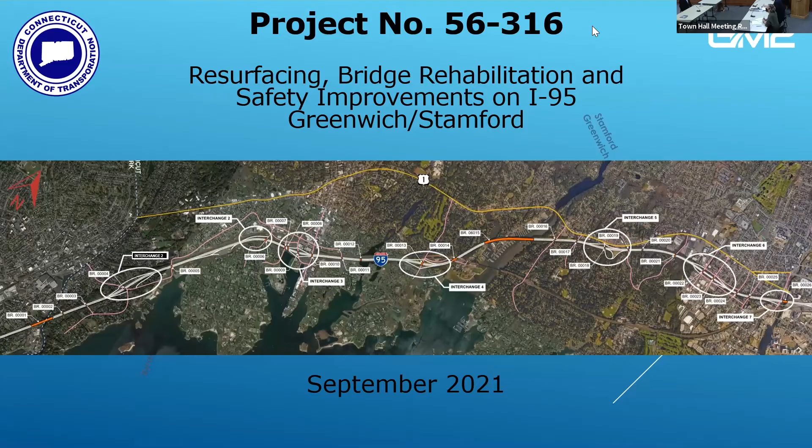So for this project, my team is starting to get really into the weeds, no pun intended, performing what we refer to as an inventory and analysis of exactly what's going on out there for existing vegetation, reviewing the impacts of the project. We are hearing you guys loud and clear about your desire to expand native reforestation species wherever possible, and work with you in a design sense about any opportunities to develop gateways and things like that.

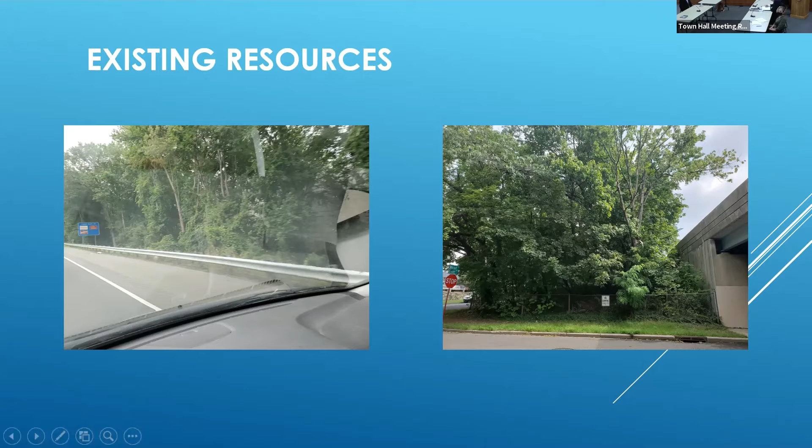Next slide, please. So what's out there? Next slide. Windshield survey. I've walked many of the neighborhoods surrounding the corridor right now. I have a pretty good idea of where there's great plant communities and where some of the plant communities could actually use some revitalization.

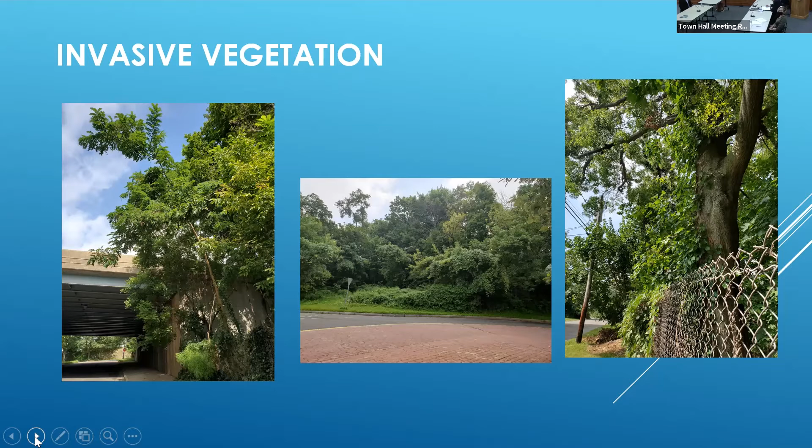Next slide. You have a lot of what you may think are canopy species, and I support and appreciate the value of some of these species as canopy trees, but all of these trees are considered invasive species. So they're weak wooded, and they're not performing a whole bunch of ecosystem services. So I just have to share that with everybody as we move forward. Next slide.

Wherever there are good resources along the corridor, which would be impacted by the project, we're going to find them and do everything we can to keep them out of harm's way or protect them. Next slide.

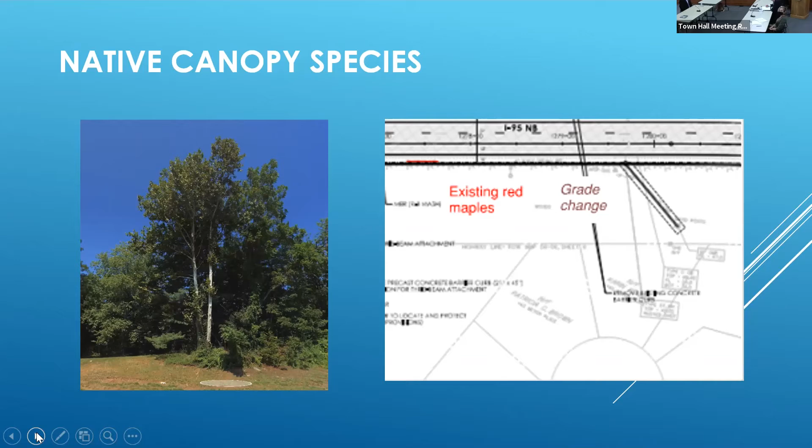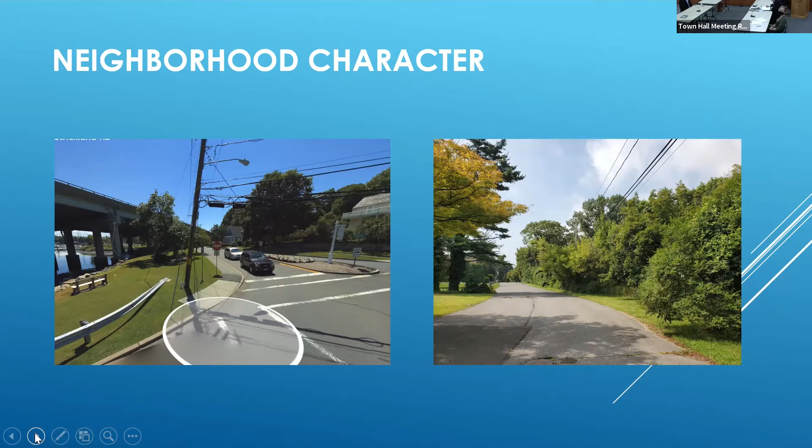But most of all, we're very cognizant of the people who live around the infrastructure and the neighborhoods and so on. We are here to listen, and we're really looking forward to getting more detailed information from stakeholders about their specific concerns.

So we can incorporate that into the preliminary design and make everybody happier when they see it at that stage. Next, the project impacts. This project, as opposed to others you may have seen, has really limited areas where we're doing wholesale clearing of a slope. We have some drainage structures to incorporate into the existing vegetation, which I just shared with you for the most part.

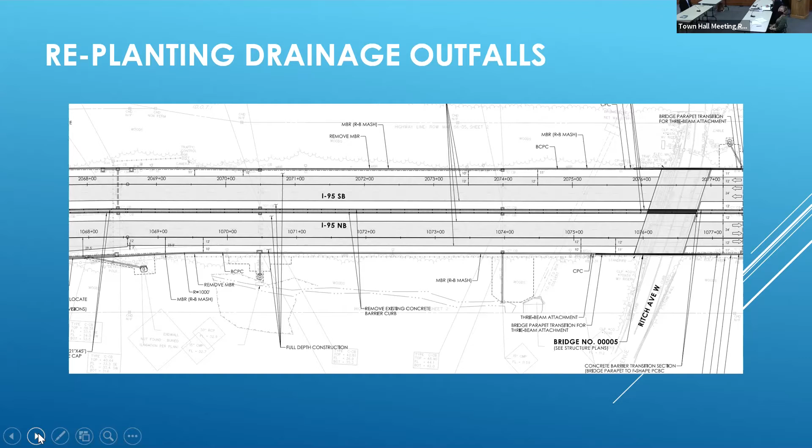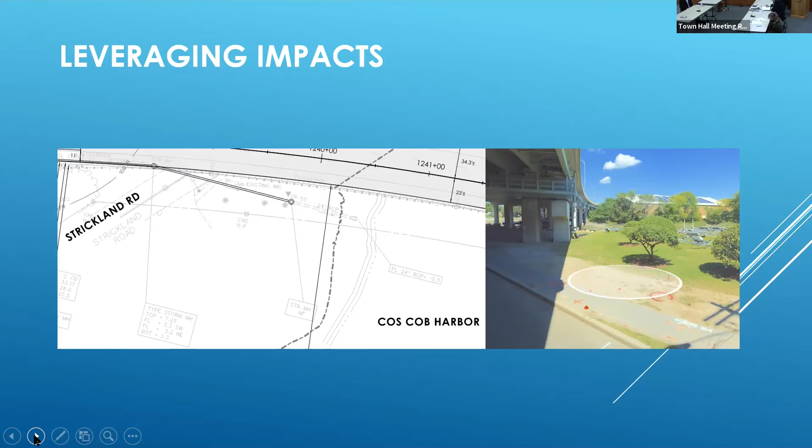Wherever we do have impacts, I have this picture up here and the corresponding drainage work that has to be done. We're going to leverage the impacts of the project any way we can to make it come out lemonade.

As you can see, I overlaid an impacted area, sharing with you the existing vegetation, which may or may not be impacted. We have a standing but dead tree in this area, so that's the way we're going to drill into this. If there's a good tree and we can protect it, we will.

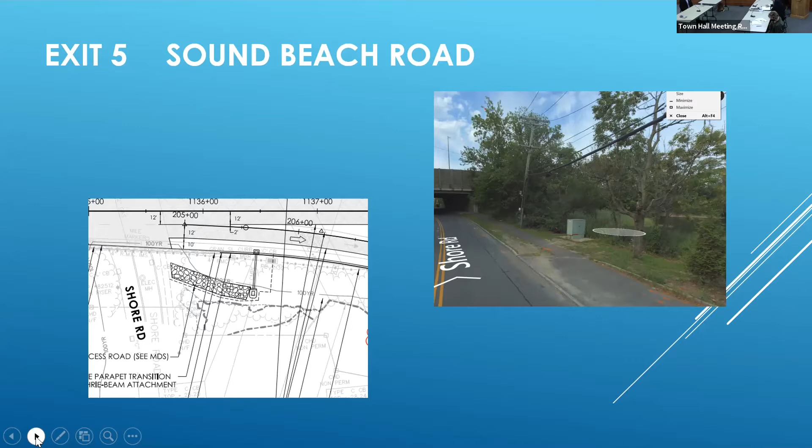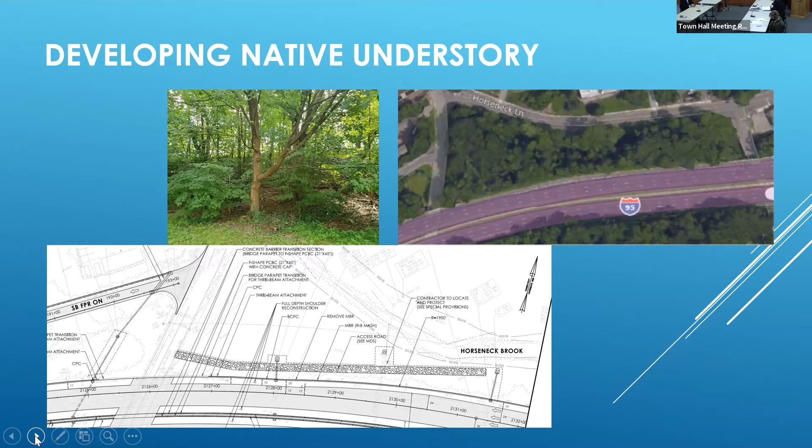Any impacts that we have, because of the engineering, drainage, and maintenance needs on this project, we're going to look at as an opportunity to revegetate and improve biodiversity. I'm going to go into that area and walk around to see where the nice oak trees are and see how we can protect them.

But also see how we can enrich the vegetation wherever there is an impact. Next slide. Okay, this is a little complicated, the next two sections I'm going to walk you through, but this is what we do. We focus on the cross section, and anyone who's been in our previous meetings knows we take it very seriously.

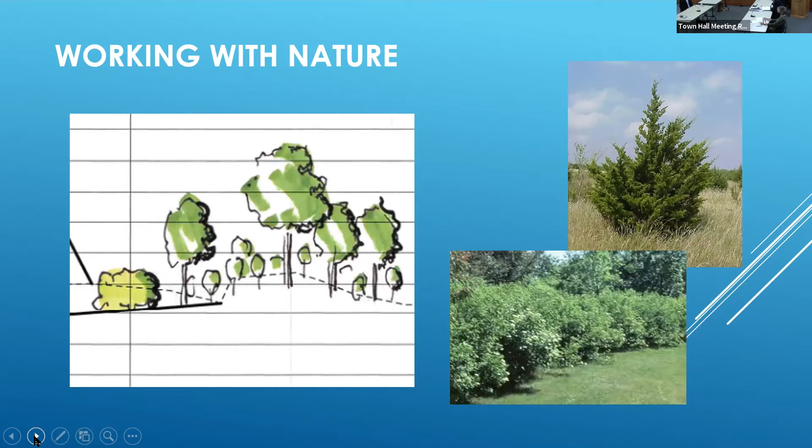We have a lot of things going on in our right-of-way, but we want to work with nature. We need to understand what Mother Nature would do in Connecticut if left alone to her own devices, and I'm going to show you how we work with that. Fighting Mother Nature never works.

So not only are we working with our maintenance people, but we're also working with drainage structures. I'm showing you a reforestation in Bridgewater on the left-hand side, and there's a swale behind that retaining wall, which can't have reforestation trees growing up against it. It would knock the wall over and clog the drainage system.

So we are talking about using the right kind of vegetation in the right place to provide reforestation and other services. What we have learned from our reforestation efforts is that we stay out of the way of the orange trucks and work with how the highway corridors are maintained, and we are successful. The image on the right, I just drove past that area—those trees are 40 feet tall. They went in at 2 to 3 foot tall whips.

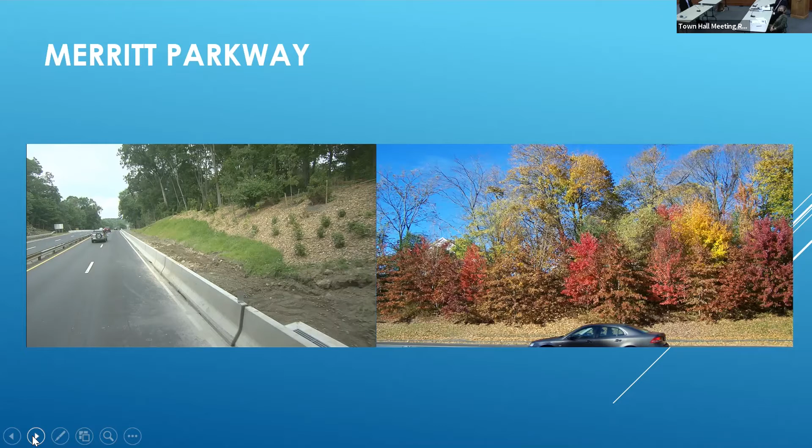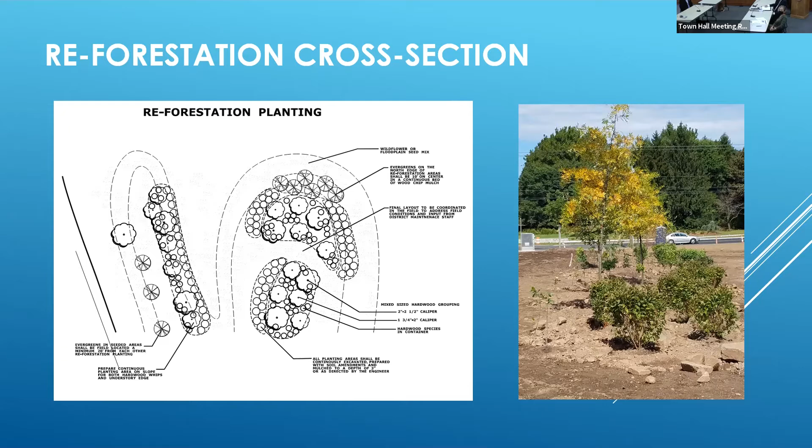This is a sample of the project that's ongoing down in Stratford. This is what our reforestation looks like on the plan, and directly after construction it's going to look like the pictures I just showed you, but it's going to work. We're going to put native tree species back on the 95 corridor wherever we can.

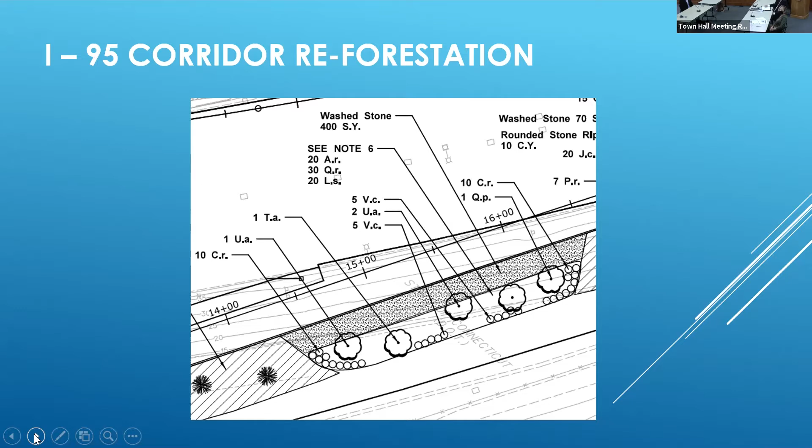So those plant communities, some of the sketches I just showed you, sometimes they're going to be evergreen trees. Evergreen trees in and of themselves, we have to be able to mow around them, so we have to really consider carefully where those are going to be located along the corridor. But we will look for those opportunities.

The native canopy species—again, what I'm showing on this slide, the lower picture, I just drove by it. That's the Fairfield salt shed. The trees go in at 2.5 to 3 feet tall, and we use them in combination with 2.5-inch caliper trees.

The picture on top in the center really shows how this works. This is the Old Saybrook train station. The oak trees on the left went in as whips not too long ago, and look how they are almost as large now as the 2.5 to 3-inch caliper oak on the right-hand side of that image.

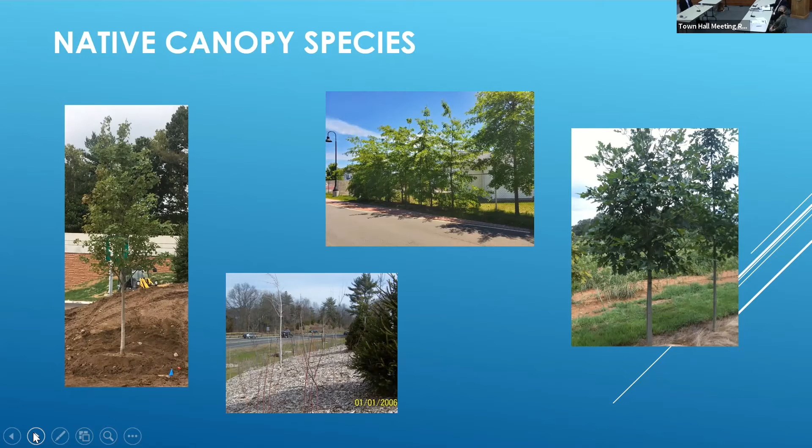So this is what we do, and it works. We're planting an entire cross section and plant community wherever we can, so that our maintenance people go around it and leave it be. And we get those ecosystem services that everybody is looking for.

The lower image in the center is working with maintenance. We have some sweet ferns and a London plane tree, strategically locating that plant community on a mini slope that we knew maintenance didn't want to deal with. So that's what we do on our projects.

And that's what you'll be seeing from us as we move forward, wherever we can augmenting the plantings with pollinator species that are more difficult to establish by seed, using gallon containers for some species that are more difficult to establish that way.

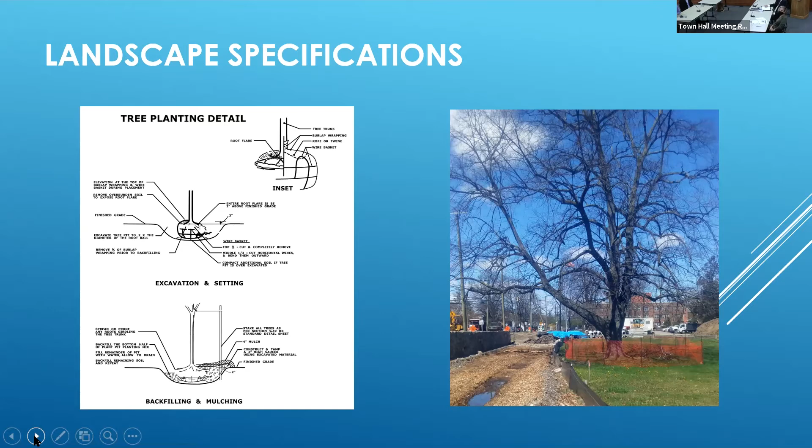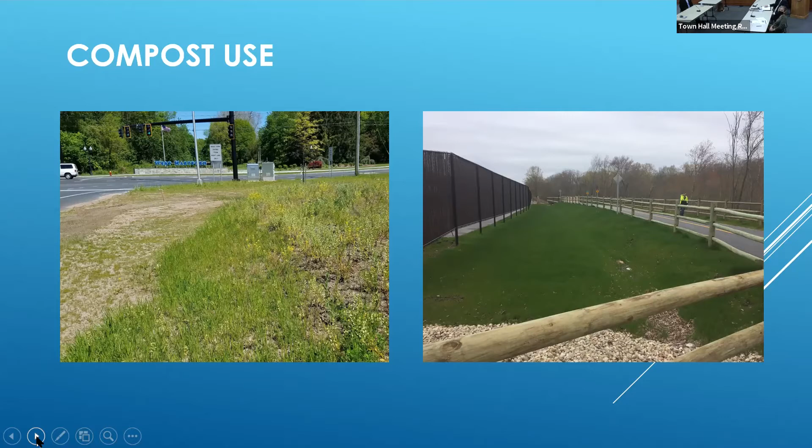Next, we're implementing compost use. In the left-hand slide, I'm showing a sustainable seed mix where compost was applied on the right-hand side and not on the left-hand side of that upper picture, and it really makes a difference in performance. You can see the swale on the right-hand side, fully covered with compost and excellent turf establishment. It's excellent for erosion control and plant establishment.

But again, working with maintenance wherever we can—the plant communities have got to be mowed around. Otherwise, they're going to succumb to the encroachment of invasive vegetation, which we don't want as we work together on improving canopy in Greenwich.

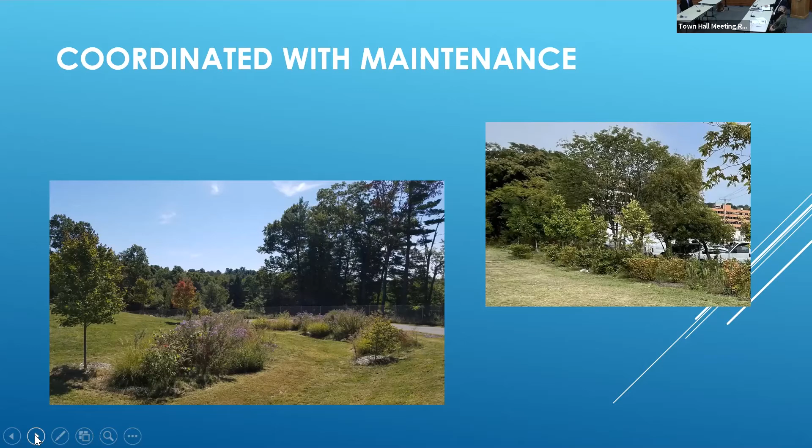The image on the right-hand side is a very small pocket of reforestation in Stamford, just to illustrate the level that we go to. It's a small area—there's probably only 30 whips in there—but we still want to reforest wherever we can. It's a natural part of our process.

This is also Cortlandt Park, and the elm trees that we put at the gateway, at the reconstructed wall. It is, in the end, about your communities. We're cognizant of that—very cognizant of designing for you, the economics of your community, and the walkability of it as well. And that's what I have. Thank you.

Thank you, Sue. Appreciate the update. I just want to emphasize a point that Sue made a couple of times during her presentation. Sue works on the capital project side—engineering, construction—so her job is to integrate good landscaping practices into our projects. But there is a handoff, to what she called maintenance forces, the guys in the orange trucks, who are out there every day mowing, weed whacking, doing the work of keeping the highway safe and operational. So there needs to be synergy between what we install in our capital projects and the handoff and ultimate maintenance of our projects to highway operations.

Next, I'd like to move to a short discussion on the I-95 corridor project. Neil Patel will be providing an update on the status of this project, but very quickly, let me tell you what this project is. Typically when we do resurfacing projects on our highway system, we use a vendor-in-place kind of contract, a maintenance contract. But some projects do not lend themselves to that—typically projects where we haven't done a lot of rehabilitation work through the years, and such is the case here in Greenwich.

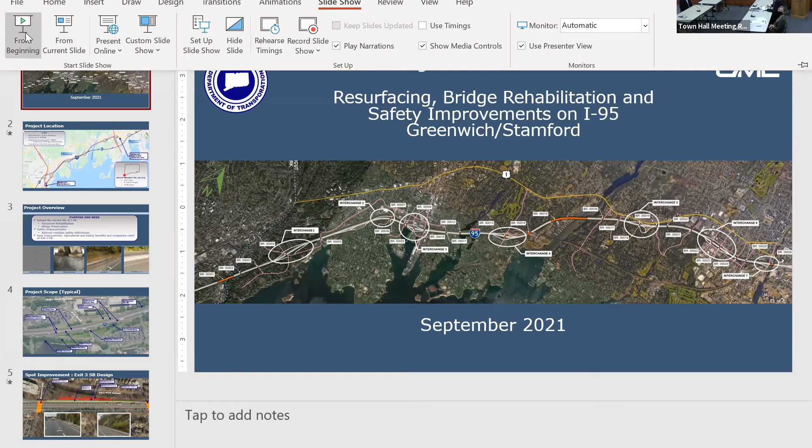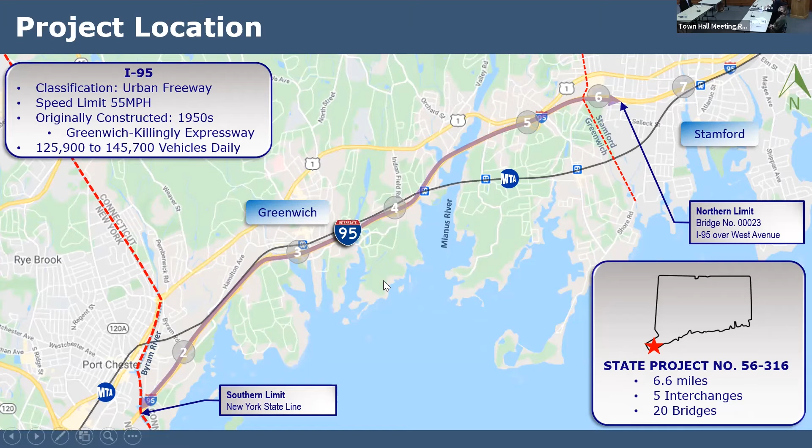Thank you, Mark. I think Mark started off by explaining the scope of the project. Let me start the slideshow. A lot of these slides are similar to what we showed at the virtual public information meeting back in January, and through some of the other meetings we've had since then with Senator Kasser and other constituents. The project limits start at the New York state line and continue for about 6.6 miles to exit 6 in Stamford.

Again, the purpose and need, as Mark mentioned, is really to extend the service life of I-95 and maintain the facility in a state of good repair. The focus is the pavement and the underlying original concrete from the 50s when it was constructed. We also want to make sure we address the bridges—this is bridge preservation type work, minor bridge work addressing the deck, partial deck patch, and the parapets. We don't have any bridge replacements or deck replacements proposed within this corridor at this moment.

Safety improvements are a big part of the purpose and need here. We want to address the existing roadside safety deficiencies, upgrading the guide rail and the median barrier, which in some places is only 32 inches, to bring it up to today's design standards. In addition, we're addressing a spot improvement at exit 3 southbound, which will provide operational and safety benefits and some minor congestion relief on the main line there.

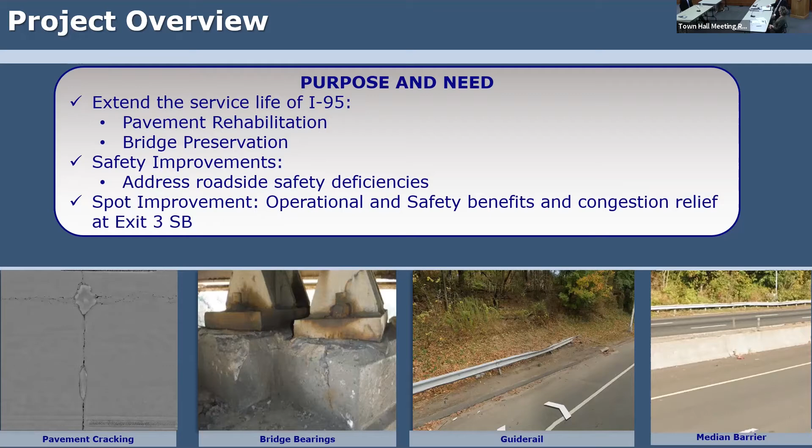In terms of addressing the pavement, one thing we're looking at is the mix design—we heard that feedback from constituents at the virtual public information meeting. We continuously do this; our pavement design group works with the UConn Cap Lab, always researching different types of pavement to work for every situation. In this case, we'll be using what's called a gap-graded mix, which performs well. Our first focus is durability, performance, life cycle, and safety, making sure the design meets all those needs. As a secondary benefit, there are some minor noise benefits, which may be evident in the first year or two but become less prevalent as the pavement wears.

This plan shows a typical slide of our proposed improvements within the corridor. As mentioned, all the illumination will be upgraded, along with new overhead signing throughout the corridor. The drainage improvements are extensive—this is an existing system from the 50s with a lot of metal pipes, and we want to make sure we address a lot of those deteriorated pipes.

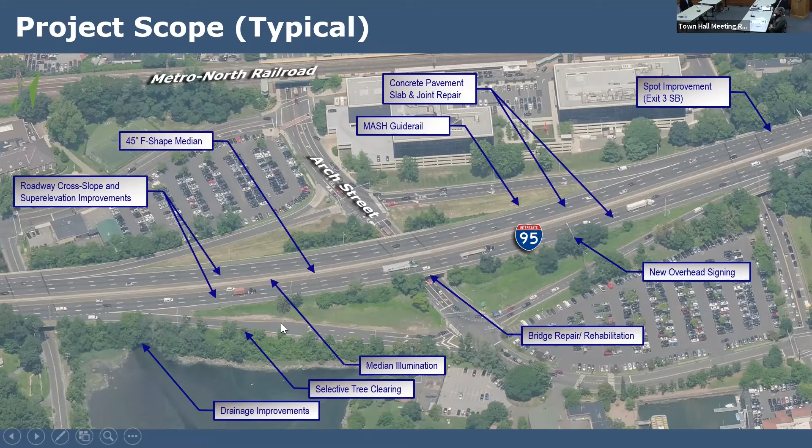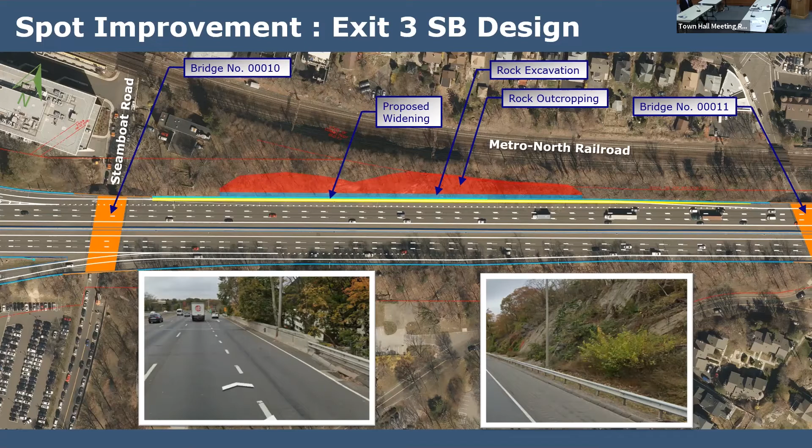At exit 3 southbound, we'll be extending the deceleration lane approximately 1,200 feet to provide sufficient storage for vehicles. We know that backs up, especially during the morning, onto the main line—a very dangerous situation. This improvement, coupled with the town's recent and ongoing work at exit 3 on Arch Street with traffic coordination, will definitely improve the situation.

Susan talked about the approach she takes, and I wanted to point out one of the areas we'll be addressing. To do some of this drainage work, we've got to build access roads down to these outlets. Our maintenance folks have told us they've had a hard time cleaning and maintaining many of these areas, and since we're coming through with this project, we have to upgrade some of these outlets. So we're going to be working to install some of these access roads.

We'll work with Susan on each and every condition to determine what treatment we can do going forward in terms of landscaping. Some of these will be permanent access roads, about 10 to 12 feet wide. We talked to our maintenance folks and asked them what they would need to get down there. So it's not tree cutting through the corridor, it's really just in select areas.

Schedule: right now we are in the preliminary design phase. We just started that, we've got our designer on board and full steam ahead to meet this schedule. We anticipate preliminary landscape design plans in January and February. Jim, as we've discussed previously, we'll be coordinating those as they become available and make sure they're reviewed by the town. We do intend to proceed to final design by June and advertise probably early fall, then start construction in spring of 2023 with about a 3 to 4 year duration.

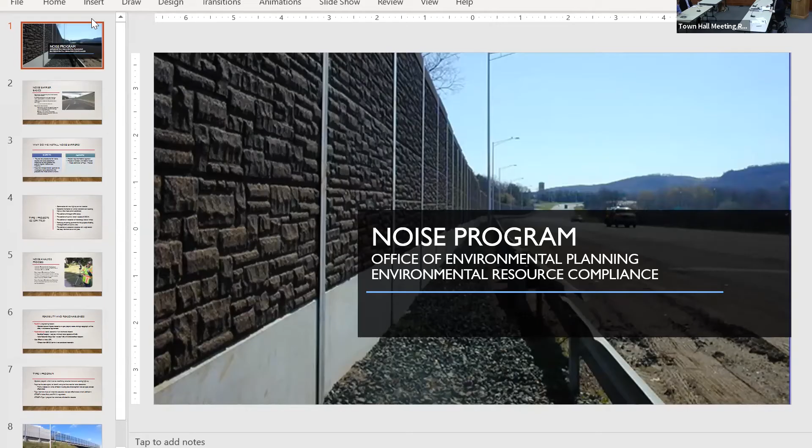Okay, thank you everyone. Just giving Neil a chance to pull up the presentation. Kim Lassay, Bureau Chief of Policy and Planning. One of the groups I'm proud to lead is our noise group, and I'm going to try to give a little bit of background, kind of a noise 101 here, to lay some framework for further discussions.

So thank you, Neil. Every project that we have goes through a screening to determine if a noise analysis and a noise study is required.

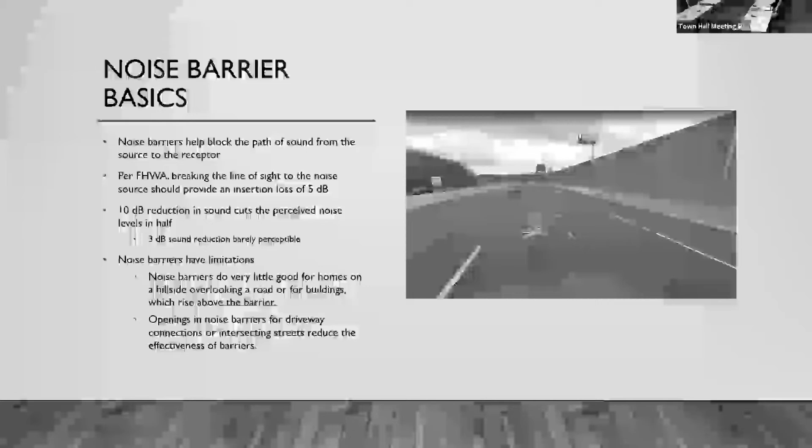Some noise barrier basics, just to go over what noise barriers do and don't do. Noise barriers certainly can block sound, but there are criteria that we need to meet that are set by FHWA as to when noise barriers would be considered and also when they would be installed. There's a lot of things that play into noise. You need to think of noise as a wave, much like light waves are - they travel and do different things in different topographic conditions, and different things when they hit buildings. So a little bit of science there - I'm not the science guy, but just to get the framework of how noise works.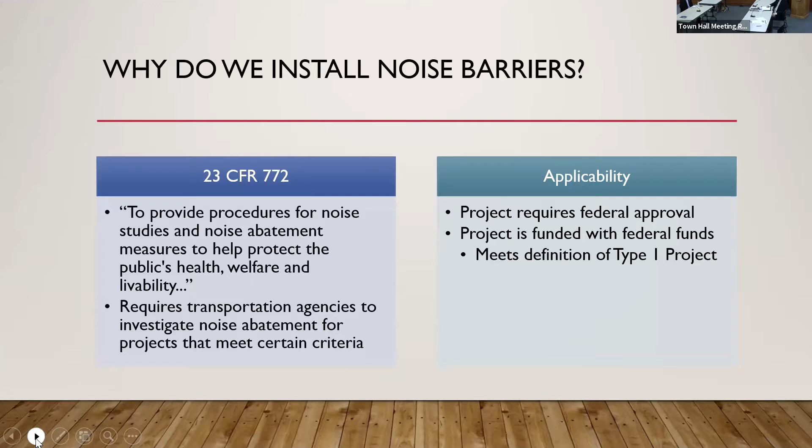So again, we follow the Code of Federal Regulations when it comes to determining when noise barriers are installed. The project Neil is leading does not qualify as a type 1 project. Type 1 projects - if you could go to the next slide, Neil - are things like a new highway on new location, addition or relocation of an interchange, looking at additional through lanes, or adding a weigh station, rest stop, rideshare lot, or toll plaza. This project, as it sits right now, does not qualify as a type 1 project, therefore a noise study was not conducted.

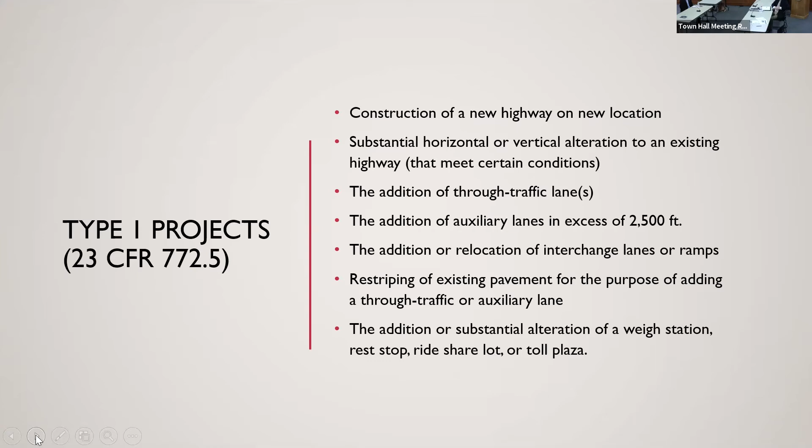So I was listening the night of the public information meeting and realized there were a lot of questions around that. These are the guidelines that we are held to go by. To give a little background on what would happen if it was a type 1 project, I can run through these slides fairly quickly.

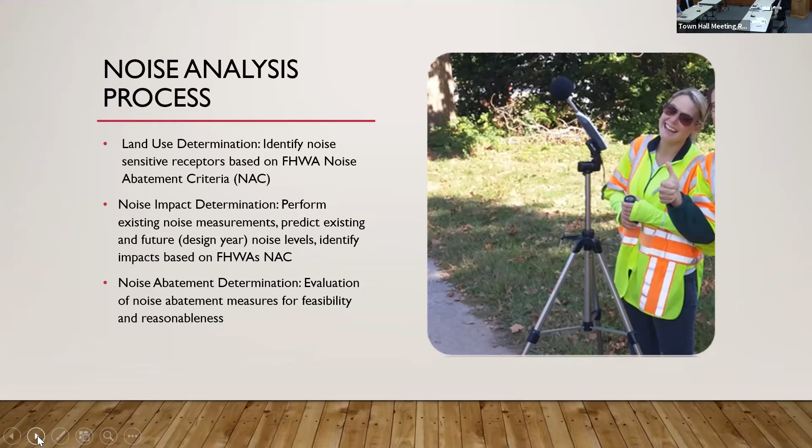So a noise analysis process would be: we would look at land use, look at if we have sensitive receptors in the area, and then assess those based on FHWA's noise abatement criteria. We would then take existing noise readings in those areas, and there's actually a very complicated model that gets run that looks at traffic as it exists, looks at traffic as it's forecasted to be based on the project, and looks at whether a noise barrier would be warranted. There's also a cost benefit analysis that is done.

So we look at both feasibility and reasonableness. There's engineering factors that come in. I had mentioned topography. We look at drainage, we look at utilities, we also look at safety issues.

And then the reasonableness comes in when we look at the number of benefited receptors. So a benefited receptor could be the number of residences that would benefit from a noise wall, as well as businesses that might have an outside recreational area. And then we look at the cost-effective index.

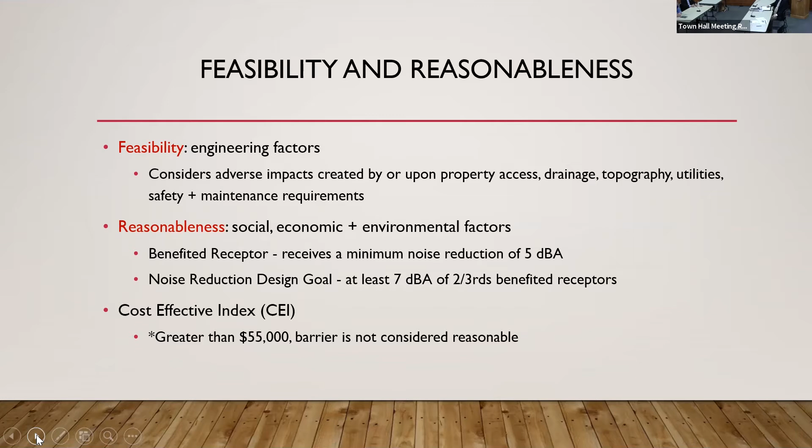And in order for a noise barrier to be installed, it would also have to meet that cost-effective index. And right now, based on our noise policy, that's at greater than $55,000 barrier per benefited receptor.

So there is another type of program, and we have been in receipt of some correspondence questioning this type of program. A Type 2 program does not rely on a Type 1 project coming through the area. A Type 2 project would be a standalone program that would look at retrofitting noise barriers on an existing highway. There was a Type 2 program many years ago, but it has been unfunded for decades.

And this is certainly something that we can discuss. We are in the very infant stages of looking at a Type 2 program. The first thing that we have to do is a statewide study, and we are in the process of getting that set up. It is a step in a many-step process. Our Type 2 noise program, if one were to be initiated, still does need approval from FHWA.

What it would basically do would be to give us a heat map of sorts as to where issues may be across the state. It's a very rough model. It doesn't take into account topography. It doesn't take into account a lot of the factors, but gives you that rough look.

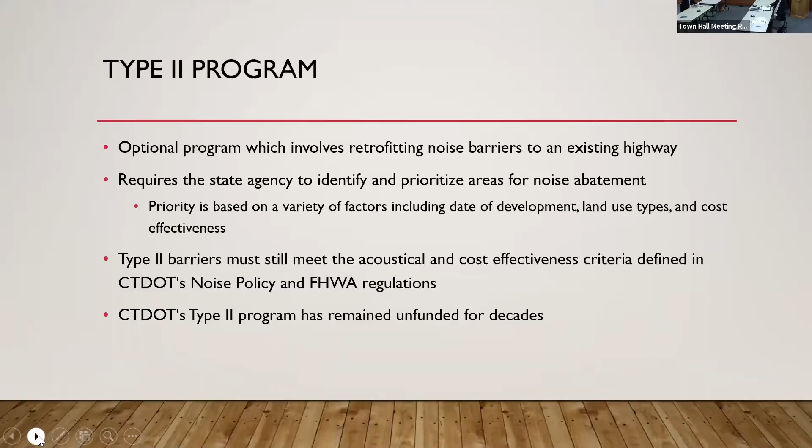And then it would help us to prioritize and look at what areas would warrant a Type 2 program. An important thing to note is that the Type 2 program would then have to look deeper into each of those areas that was identified. So it would be something that's quite a ways out as far as setting expectations, but something that does exist and has been brought to our attention as to, other states are doing this, why aren't you doing this?

So I just wanted to give a quick overview and be happy to take any questions.